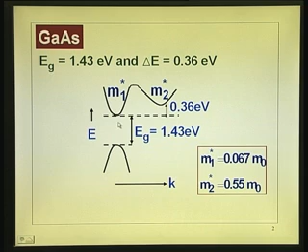That is what we have seen, and also the other materials like indium phosphide have similar characteristics, because the energy band gap is 1.35 electron volts and this gap is 0.53. Now, this has some impact on the peak electric field and also the energy required to transfer the electrons from here to here. They are more than that of gallium arsenide.

Gallium arsenide requires 0.36 electron volts. This requires more, that means you must go to higher fields. Now, so we just go back to this diagram. That illustrates everything.

The negative differential mobility, if you want to call it that, you can, because as you increase the electric field, the velocity falls. So the negative differential mobility region is this, that is due to the electrons getting transferred onto the upper valley.

In the case of indium phosphide, the transfer takes place at about 10.5 kilovolts per centimeter. The reason is that delta E is 0.53 electron volts, and also since it is subjected to higher energy, the peak velocity is more than what you get in gallium arsenide. It is because it gets transferred much before it can go to that velocity.

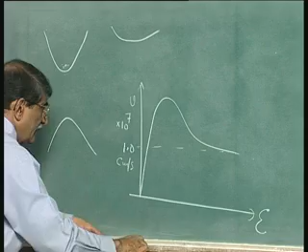Now, the plot that we are given there, let me just keep it here so you can see. It goes through a thing like this, and that is almost 1.0 into 10 to the power of 7 centimeter per second. Why derive all this? Let me just put it straight away: 10 to the power of 7, and this is 2.2 times 10 to the power of 7.

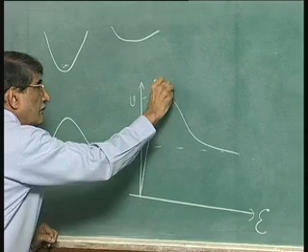This curve is derived or achieved at steady state. You apply electric field, give sufficient time, and the electrons can transfer from here to here. Now, you have electrons which are suddenly subjected to this field. That is the way one can understand it easily. This concept is slightly involved, but not very difficult. All you have to visualize is that it takes time for electrons to get transferred from here to here. If I apply electric field and give enough time, then it will get transferred to that.

Now, suppose I subject it to this field, high field, right away. For example, if I put 10 kV per centimeter, you are down here, what would happen? The electron which is present here immediately is subjected to that high field, and it experiences the benefits of being here. What I imply is it experiences a smaller effective mass. So it has got high mobility, but now the field that it experiences is very high. If I am here, it is a different issue, the field is low. But if I apply high field suddenly and launch the electron into a region where high fields are present, then it will actually get accelerated to very high velocities.

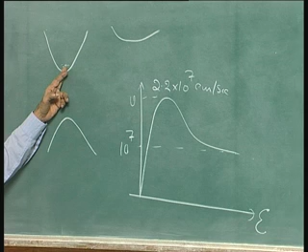During the transient condition, if I apply suddenly 10 kV per centimeter, it will not go directly to this velocity. To reach this velocity, it has to go through this transient. When it goes through this transient, in this portion you are talking of low fields. Supposing when the electron is in the lower valley, it experiences 10 kV per centimeter, it will be right up there before it goes into this portion. So there is a time lapsed before it acquires, it goes from 0 velocity, drift velocity, to that velocity.

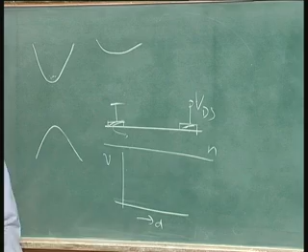So what are we telling now? What we are telling is, if I have a channel, and if I launch electrons here, I do not show the gate here right now, these electrons will move here. Let us say this is high field. These electrons will move here with velocity. What will be the velocity? Velocity versus distance. This is a channel, the gate is in between. Let us not worry about that right now, because after all the field comes between these two. You go through it like this. What we were concerned with is, if the field is high, you end up with velocity saturation, that is steady state. But in the transient conditions, it may have even 5 into 10 to the power 7 centimeter per second.

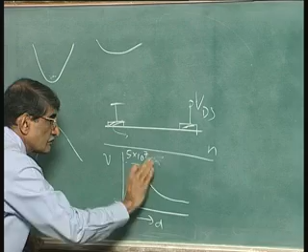That high, and this distance could be as much as 0.5, 0.7 microns. What are we telling? What we are telling is, suppose I reduce this distance here. Now, for this situation which I have plotted here, the average velocity will be the total thing divided by distance, average.

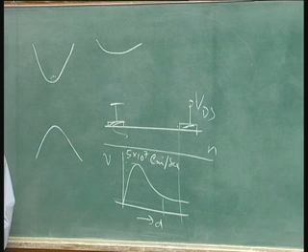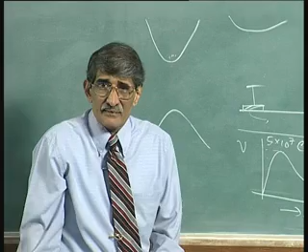Now, you can see where the impact of this velocity overshoot effect is. Make the channel length shorter. This exactly works out against the belief of people that short channel effect devices, gallium arsenide will not give the benefit, because they were fearing that the velocity saturation Vs is almost same in silicon and gallium arsenide. So, when you go to short channel devices, you will not have any benefit, but now you can see in the initial region of 0.5, 0.6 microns, you will have velocities much higher than saturation velocity.

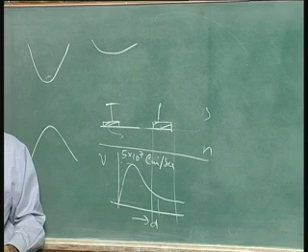Now, if I make the channel length shorter, that is, I put the contact instead of here, I put it here, which is about 0.6 or 0.7 microns, let us say. I put it somewhere here. What happens? What is the average velocity? Right through the channel, the velocity is more than the velocity saturation.

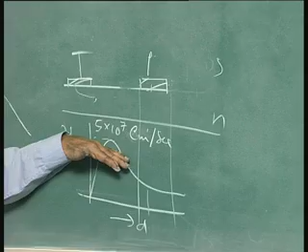You end up with devices which can give J is equal to q n into V, V average is above 10 to the power 7, 2 to 3 times or 4 times the velocity of what you can get in saturation with silicon. This is the reason why you get transconductance with gallium arsenide which is much higher than that of silicon, even when the device channel lengths are shorter.

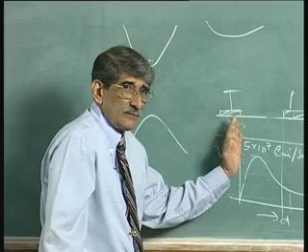Okay, now the only condition is where you get the gate control, that is the point at which the electrons must be injected. After all, you should be able to control the current. The real channel or the gate is the gate region. So you must launch electrons right into the mouth of this gate, the source end of the gate with cold, so that from there it gets accelerated like that. So, what we are telling now, is that clear enough?

So, you get velocity overshoot effect over a distance of 0.5, 0.6 microns easily. And you see, the more the field, more is the velocity here. Why? The electrons are in the lower valley, they experience higher field, V is equal to mu into E, mu is high, that is why you get that.

In fact, let me finish this thing, because other 1 or 2 things between silicon and indium phosphide I can just quickly go through, because that is the same effect.

Now, what we saw, the whole discussion came up because we are trying to find out 2 devices in our last discussion we compared. In one device, the n plus region comes right up to the gate. In another device, the n plus region is not there. We were concerned about that. Let us take a look at this, if this is understood, okay.

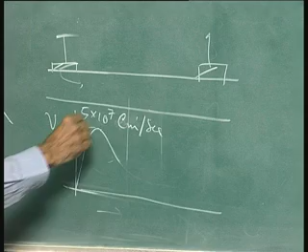If I put this region large, and if there are high fields present, which is very easy, 2 microns if you put, you can get high fields quite easily throughout. So, if I apply voltage here, I am putting the same curve. A situation where the drain contact is put here, then you get a velocity like that. If the drain contact is far away, this is where it is launched. The electron goes through the transient within that 0.5 microns, rest of the 1.5 microns, suppose it is 2 microns.

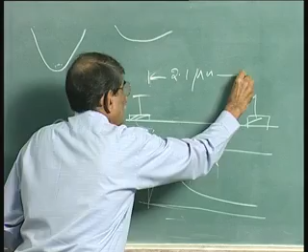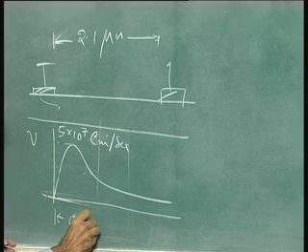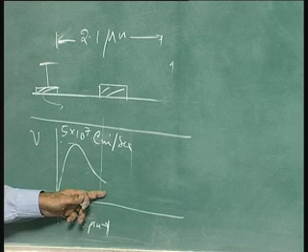2.1 micron, that is what we were talking of last time, if you have. When I apply voltage, this is only about 0.5 microns if I take, or 0.6, 0.7 microns. Beyond that point, the velocity is saturation, that is like in silicon. So, a device with this long channel, in the sense source drain contacts about 2.1 micron, undergoes that velocity overshoot effect initially, and rest of the portion, 3/4 of that portion, it is lower velocity. The average velocity is actually smaller compared to the situation where I put it here. Before it has reached velocity come down to steady state, this whole thing is the transient condition itself.

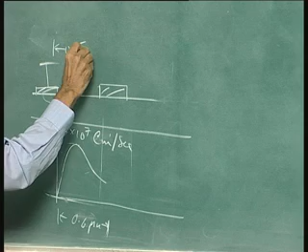So, if I put the contact at 0.5 microns, within that 0.5 micron, the velocity is high. So, you are actually operating the device in a region where these velocity transient effects are existing. It has not reached the steady state. Who cares whether it is in transient condition or steady state? All that you want is high velocity electrons. So, that is why in the two devices that we discussed, when the n plus contact was, let us just put that down now.

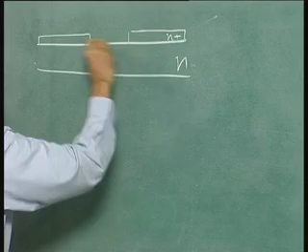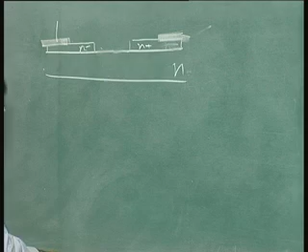In one device, I just put only the n layer. In another device, you had the n plus layer going all the way up to this point. You put the contact here, of course with etching etc. which I'm not showing, and I put the gate here. This was 0.5 micron, as in the previous lecture, and this was 0.25 micron.

Where are the electrons launched now to the channel? This is the channel, notice the difference between the channel and the gate. Electrons are launched here, and the distance here is 0.5 micron, and this is 0.25 micron. What is this distance here? 0.5 minus 0.25, that is 0.25, divided by 2, gives 0.125.

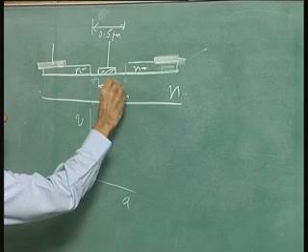That means the electrons here, if I plot velocity versus distance, right up to this point it is like that, and then like this - that's the overshoot effect. So the currents are higher, transconductance is higher.

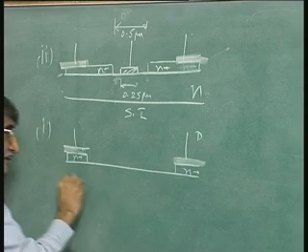Now in the second case, this is semi-insulating. This was device number 2 in the previous lecture. Device number 1 had only n plus present here, and you have the source, and n plus is present here with the contact drain. And this is the n layer, and the gate is present here.

In fact, the gate is present exactly at that point, same way. The only difference is that the n plus layer is removed from here. Now what happens? This is 2.1 micron, and this is 0.25 micron. So 2.1 minus 0.25, that is about 1.85.

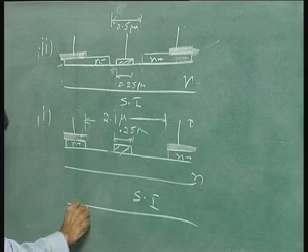1.85 divided by 2, so that is close to 1 micron. If you plot the velocity versus distance here - the electrons are launched here, it's as good as metal put here, n plus layer. Here the electrons enter the channel, it's cold here, it gets hotter and hotter as it moves inside. So this is about 1 micron.

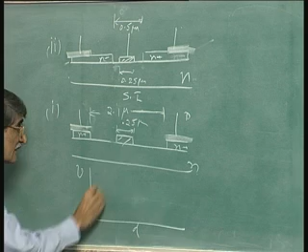So before that, everything is over - it has experienced and enjoyed its overshoot effect right at the beginning. By the time it has reached the gate, it's at velocity saturation. So over most of the region under the gate, it is lower velocity. In fact, we saw it was about 1.1 into 10 to the power 7 centimeters per second, whereas in the other case the average velocity was close to 2 into 10 to the power 7 centimeters per second, 1.9 - that's what we saw. You can see this is a remarkable thing that we saw.

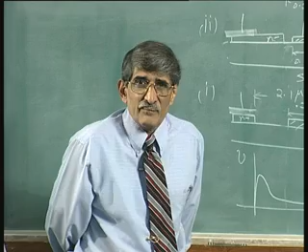Now what do we conclude from here? What we conclude is, if I have to make a short channel device with gallium arsenide, you can't afford to make it like this - absolutely no use, because the GM is small compared to silicon. You have to have a device like this. The best device you can get would be this merging with that.

Self-aligned structures - let us take a look at that. There are several other curves in my slide, but I will not show them right now. Since we are on this topic, let us get into this, and get back to other things afterwards.

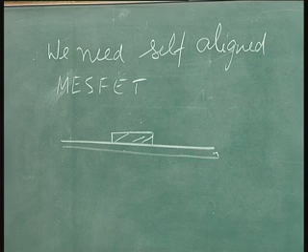So you need self-aligned structures. What is the meaning of self-aligned? You want it like this - the best you can get will be: you have an n layer, have a gate here, and this may be n layer, you must have an n plus layer like this.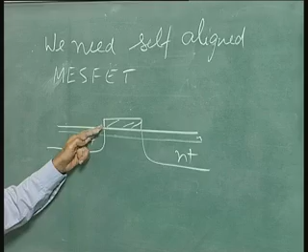Directly into this edge of the gate, electrons are entering cold, and right through, the velocities are high - velocity overshoot effect. You can put your contact here, that does not matter, the metal contact can vary. What is the problem with this? The problem is this is shorting with respect to that. It may not short, but it will give a very leaky device between the metal and n plus region. The breakdown voltage between the metal and this n plus region will be very low, you can't afford to do that. So people have been working on that.

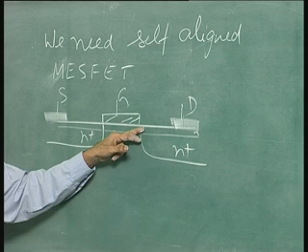So this is the targeted thing - the n plus region must be there below this, you can't put the metal right into this point, that is the hopeless situation. So all you can think of is bringing this layer as close as possible to this portion, which involves a lot of technology. One approach people adopted: you want the n plus layer here, but over here you should not have n plus. So people were very clever - what they did was bury that n plus layer a little bit below. I will put the diagram. So, one approach - self-aligned structures. We will go through self-aligned structures now.

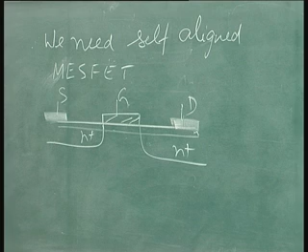Then I will write slightly below: aligned devices, structures, or MESFETs.

One of the approaches: what we told just now is not possible. What they did was take semi-insulating gallium arsenide, and then implant the channel, so you get a channel region there. This can be an epitaxial layer, or people prefer that to be implanted, because with one tool like an implantation system, you can get everything. So implant that.

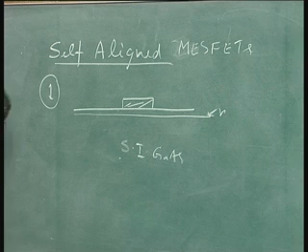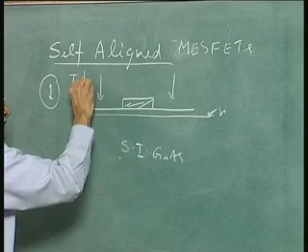Put your metal here, the gate. Now I am putting it slightly differently. You put an implantation here, with this as a mask, so that metal layer acts as a mask and you implant through that. But use higher energy, so the implanted high dose will come here, the peak of that if I plot it. Most of the implanted ions will come here.

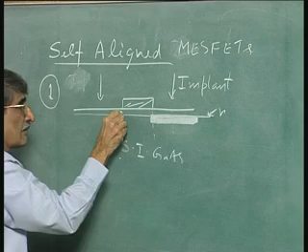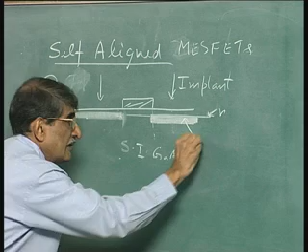It is in contact with the channel here. You put it here, this is N plus, and it is self-aligned very much. So that is a very clever technique, where you implant a deeper, buried N plus layer, buried in the sense it is below the surface, and then now put a contact here.

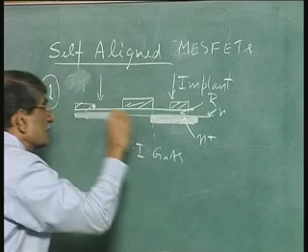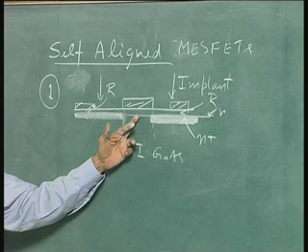It worked out all right, but the problem is this is in contact with that partially at least, the resistance between this portion, between the contact and the buried layer, there is a high resistance path, particularly if you are using a light dose here and heavy dose here, this region does not have many dopants. So between the metal contact and the buried layer, there is a high resistance path. So whatever you gain, you lose in terms of power dissipation, in terms of GM. GM is GM0 divided by 1 plus GM0 into R, that effective gain goes off.

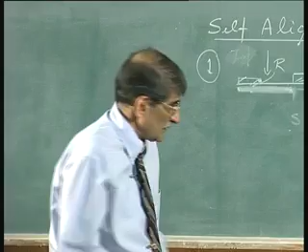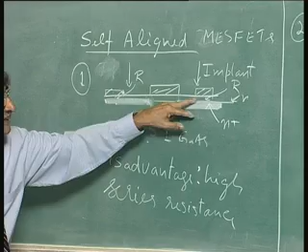So now another technique is used, we will go one by one before we go into those other curves, because we can even skip those. Second approach - so disadvantage: high series resistance coming from this portion, because implantation is deeper, you need N plus contact for reducing resistance, that is not present here, at least in this portion, and only a partial contact will be there into the channel region.

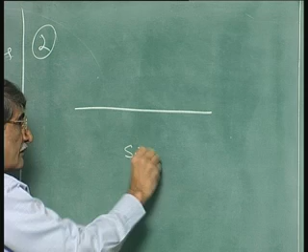So second approach is even more clever. It is like this: take a semi-insulating gallium arsenide, implant onto that, and get an N plus layer, N layer. Now what you should do is, the whole problem is if the N plus layer comes into contact with that, realize a structure like this.

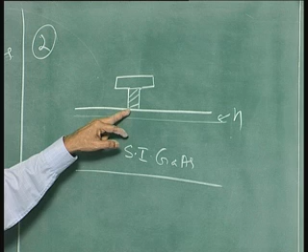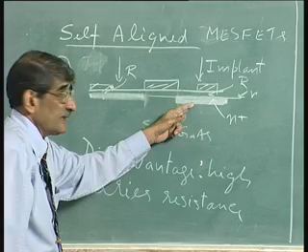A T gate, a gate which looks like a T. So this is actually one metal, this is the gate metal, which is tungsten. Of course, even there that sort of problem is there, in the sense after the implantation, let me come back to this, after the implantation of this, you must subject it to annealing.

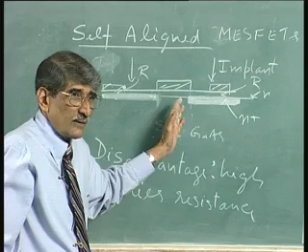If I use this gate as the mask for implantation, the gate is in contact with the substrate, you must anneal it at 700, 800 degrees centigrade to recover the damage. You can't afford to have a metal which is reactive with the gallium arsenide. So you must put refractory metals here like tungsten as the metal gate. It would work out all right if that serves the purpose, but the problem here is series resistance.

So what we do is we go back to this type of structure. And if I have a structure like this, how do you do that? What you do is, supposing you realize this type of structure, you can use this as the tungsten, this is another material, this is a mask. Let us take this structure that is realizable, and then what do you do? You implant.

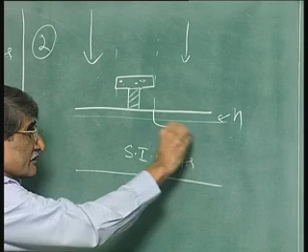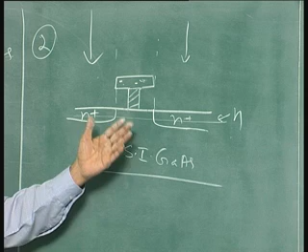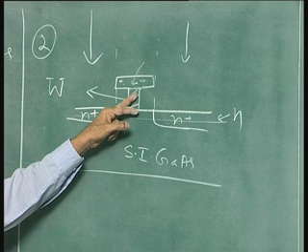You can make this as small as you like, 0.1 microns, 0.2 microns, by adjusting this. So you can get close to self-aligned structures here. The only problem here is, in fact, people have made not only devices but some integrated circuits also using this type of structure. The problem is this has got to be tungsten, W is tungsten, or tungsten titanium alloy. And this particular layer on the top, that can be a photoresist which does not get attacked during the etching of this one. So how is it made?

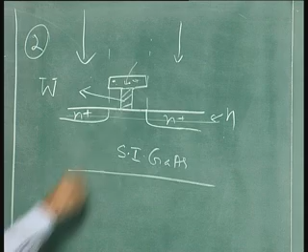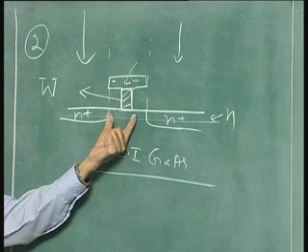Let us come back to the technology. I suppose this point is clear enough. If I can make a T-type structure, I can use that as a mask for implantation, ensuring that the N plus layer is not in contact with the gate. So the actual gate is here, and that is the gate length, the channel length. I can have this 0.5 microns or 0.25 micron, and the other side 0.1 micron, because that depends on how much this undercut is.

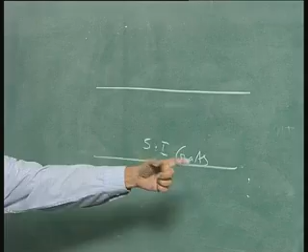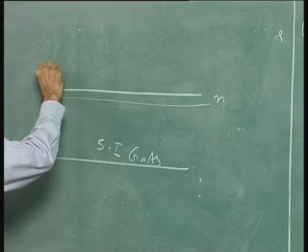So there it is made on semi-insulating gallium arsenide. Just going through how they do that. Then you have the N layer implanted, and then deposit tungsten all over. You can deposit all over, and this is tungsten. On top of that, put the second material.

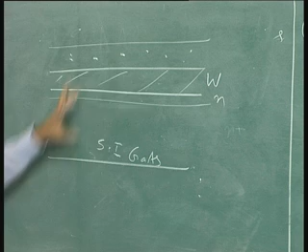This second layer can be photoresist, or you can use aluminum metal, because when you etch one layer, that etchant should not attack the other. So what you do is, after these two layers are deposited, you do photolithography and etch that portion.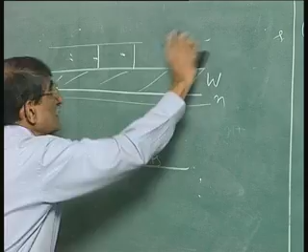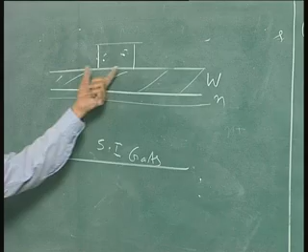You have to draw one more diagram, I am just doing it easily by rubbing it off. So you remove that by photolithography, etch it. Now put it in a plasma etching system which will not etch this, it will etch that. In fact, you can use CF4 oxygen; this will etch the target layer, it will not attack the aluminum or photoresist. A photoresist resistant to the etching will remain. This is tungsten, and this can be photoresist, aluminum or photoresist.

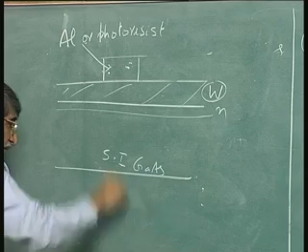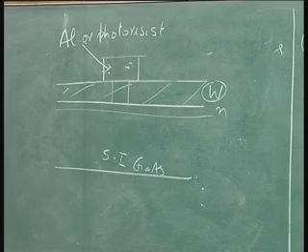It is easier to use photoresist because you can spin it on. Now subject it to reactive ion etching, which is not purely anisotropic but isotropic in the sense it will etch vertically down, but it can also etch laterally. So it comes down here, and after that, it will etch down then laterally, because it is an isotropic etchant, not an anisotropic one. Isotropic etchant will etch down and laterally also. So when you do that, you have removed all this.

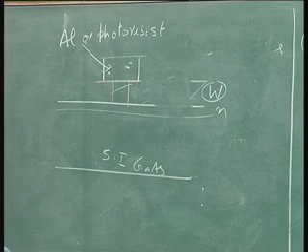Now you have got the structure that you wanted. So a T-gate can be used like that.

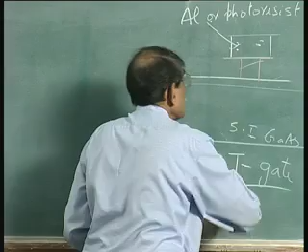The only problem here is the use of tungsten, a refractory metal. You need that because after the implantation onto this N plus portion, you have to subject it to annealing at about 700 to 800 degrees centigrade, to recover the damage produced and to push the dopant atoms into lattice sites. So people were looking into other methods of obtaining self-aligned structures.

The key thing here is to realize a structure like this, but without metal, putting the metal at the end, aligned with respect to that. That technology I will discuss now, because the entire focus is to obtain self-aligned structures. We have discussed two types: one has the problem of high series resistance, and both have the problem of using refractory metal.

So now the method that has been quite popular, though it is a bit more complicated and involved technology, is SAINT: self-aligned implantation for N plus layer technology. I do not know who invented that word, but it has come out nicely. So it is the SAINT technology that we are going to discuss now. I will go through the PPT very quickly so you can see one after another.

The starting material is such that the whole effort is to get a structure like this without metal, using photoresist instead. So on semi-insulating gallium arsenide, spin photoresist on top, do lithography, and remove the photoresist from there.

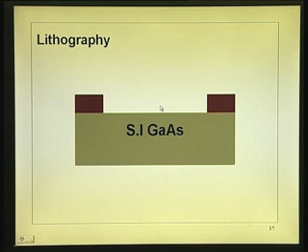So all that is needed, I could put one diagram like this: spin photoresist, open the window, use this for implanting. After all, you need to realize the channel region since semi-insulating material is not conducting; you must have an N layer, using 60 keV silicon implantation, with a dose of 10 to the power 11 or 10 to the power 12. So you get that layer there, which is the channel region that will be formed, then an implanted layer.

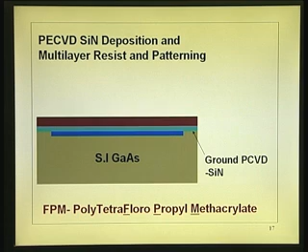Then a multi-layer resist is put, and a silicon nitride layer is deposited, because after implantation you need to finally anneal, and when you anneal you must have a cap. Why do you need a cap? To cover the arsenic and prevent its loss. On top of this is a tri-layer technique; the second layer is actually the photoresist, called polytetrafluoropropyl methacrylate, which you can very easily dissolve in acetone.

Put another layer, which is silicon dioxide. Each one is used as a mask for the next layer. Another photoresist layer there. So you can have bottom photoresist, silicon dioxide, then photoresist, pattern that, open the window there. Now you can see you are getting an equivalent of that T gate portion, the center, top photoresist, okay.

I have already shown you masked, developed, then etch this particular layer, silicon dioxide, using a plasma of CF2 and H2. You etch this. This particular top layer is acting as a mask for etching this one, protecting that. Now this is photoresist, this is photoresist. Without this layer, you can't do the etching. So use the silicon dioxide as mask when you etch this one.

That photoresist goes off when you put it in the etchant. Now use this, go back to this, use this as a mask, keep on etching in the oxygen plasma, over-etch it, you get the T structure, not in metal, silicon dioxide and photoresist.

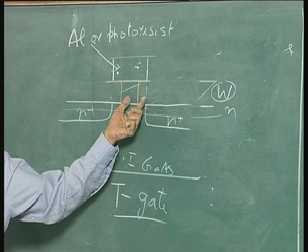How much undercut is there? Precisely you can control by timing. This undercut, that undercut, here what is shown is metal, that will decide how much is the gap between the N plus layer and the gate. So you can precisely control the undercut.

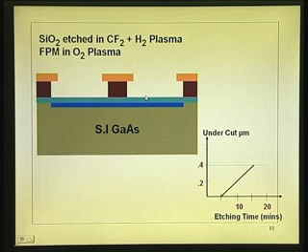Now go back to this curve, it is very helpful. This is the one through which you implant here with the metal, but whereas in this particular case what you are doing is you implant using this mask. See the implantation coming through.

So wherever this is there, silicon dioxide is there, implantation does not take place, that is N plus. So this is the channel which has a low dose of 10 to the power 11 or 10 to the power 12, this is 10 to the power 13 per centimeter square dose, very heavy dose at 200 keV, so that you can go deeper.

Then I got now a channel region, if I can put the metal here, there is a gap this much, which corresponds to this undercut. That undercut can be precisely controlled by etching time. N plus implanted layer. Now just notice what you do is

Deposit another layer of silicon dioxide. You can do that at low temperature, plasma deposition, at 200 degree centigrade you can deposit PECVD silicon dioxide. That is how it comes. See, I deposit everywhere, it is conformal deposition, so it takes the shape of that. That is the oxide that you deposit.

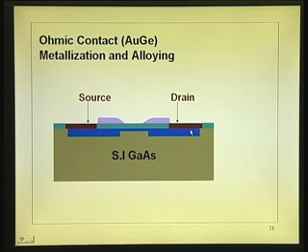So all these are done by lithography. Source drain contact, gold germanium. Notice here, by lithography you can precisely etch this portion because there is no oxide there. It is a very thin layer, just about 1000 angstroms or less. So you can etch it, even a dip etching will do, but you can put the whole layer in photoresist, remove that portion.

Now you can see you can do lift off technique again for realizing metal semiconductor contact only here. In the sense, put photoresist everywhere, only excepting this portion. So if I keep photoresist everywhere except this portion, I put it in acetone, the photoresist from everywhere with the metal lifted off, and you will be left with this. So the key thing here is after this step realize metal in that portion.

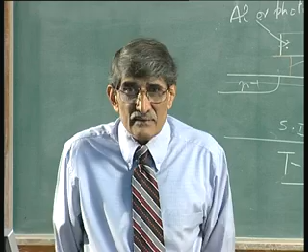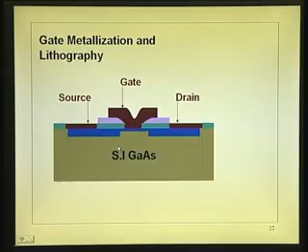Now you can see you got the MESFET which is self aligned, with the distance between this gate and this portion realized by that T that you have got. So this is a self aligned structure that you can get. This is a very popular technique, SAINT. Some slight modifications have come. The entire effort has been to achieve a gap between the gate and this N plus layer, a controlled gate gap, which can be done with this self aligned implantation technique. So I think the characteristics of this we will discuss next time.